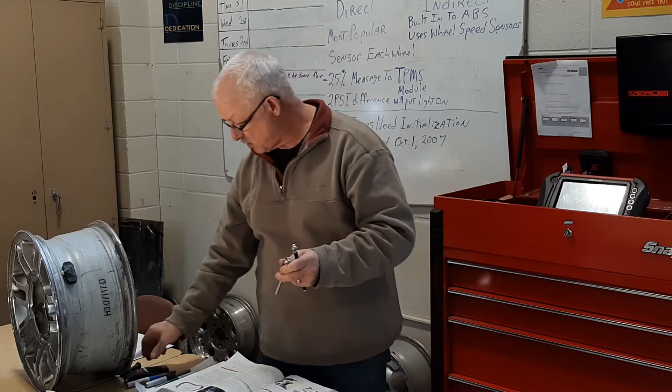TPMS is tire pressure monitoring system. Back in the day, we would always monitor our tire pressure with a tire pressure gauge. This is our typical tire pressure gauge. They do have electronic versions. And inside of your rim, you have a valve stem that seals to the rim, and you would press on there and you would know the tire pressure.

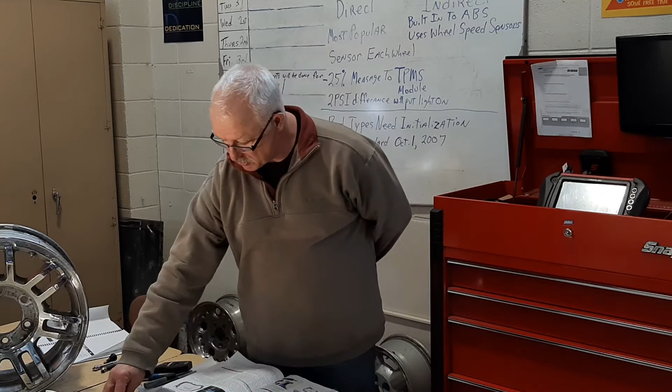All this is great and wonderful, but it does not notify the driver when they have a tire that's low on air. So what manufacturers have presented and put in cars is a TPMS sensor. This is a TPMS sensor. This is an older style TPMS sensor that bolts into the rim right here, and it seals to the rim with an O-ring. It seals right up, as you can see here.

What this sensor does is it sends out a signal to a module in the vehicle, and the vehicle monitors each individual wheel to let the driver know when he has a tire that is lower on air than the other tires. 2 to 3 pounds of air is all it takes. If your tire goes down 2 or 3 pounds from the other tires, it will put a signal on the dash that looks like this. This warns the driver that he or she has a tire that's low on air, as you can see there.

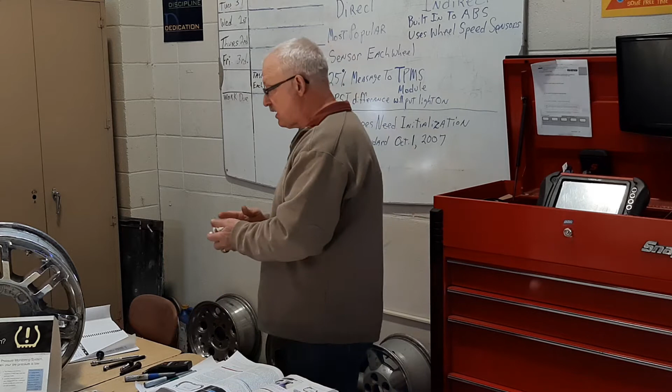As mechanics, we have to be able to put this light out. Customers don't like the light on the dash. They're warned, they're scared, they're afraid, but they don't know what that light is. So you tell them that it's low on air. Sometimes adding a little bit of air and driving down the road will make the light go out. But that doesn't solve the problem. Why did the tire lose air in the first place? It could have a nail in the tire, could have a leak somewhere. It's losing air pressure to turn the light on.

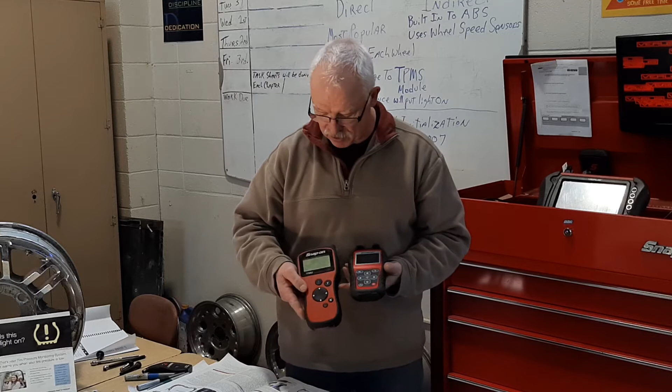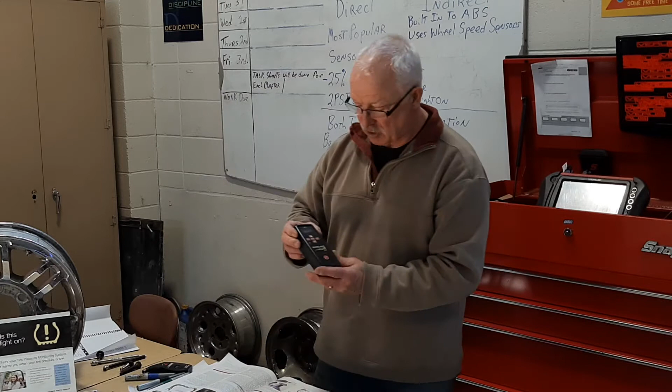Mechanics have some tools that we can use. Here's the Snap-on tire pressure monitoring tool, and we have a Maxi TPMS by Autel that does the same thing. And you can even use a small one like this, a Wheelwright Tech 300, to do the same thing.

What these tools do is you take the tool, turn it on, and put the year, make, and model into the tool. Press enter. You pick out the vehicle and the year, and you press yes. Then you scan that sensor from the outside. You press scan, and it will pull up the number of the TPMS sensor, and it will also tell you the pressure that's inside that wheel.

This is taking the place of the old tire pressure tools, the tire pressure gauge. These are what most mechanics use today to measure tire pressure.

Sometimes the light will come on, or you'll see TPMS across the dash, and it has a serious problem that gets into the computer, and you have to turn that out or figure out what's going on. These TPMS sensors have a small battery in them. Over a number of years of being used, that small little watch battery goes bad, and the tire pressure sensor has to be replaced.

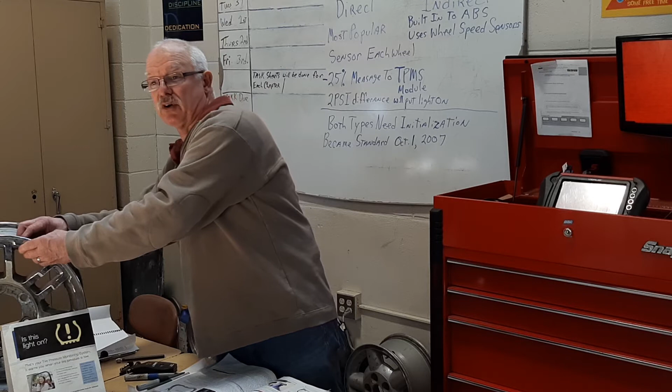I hope this helps you in figuring out what's wrong. If you have a tire pressure sensor that is bad, the tool, when you put it up there, will not pick up the sensor at all. When you go around the vehicle, do one at a time, each individual wheel, looking for the pressure and the sensor number. If you have one with a dead battery, the tool won't pick it up at all.

In our cars today, there are two types of basic TPMS systems. There is the direct system and the indirect system. What we've been talking about is the direct system. It's the most popular. You'll see it right here, this tire pressure sensor right there. This most popular direct system has a sensor for each wheel.

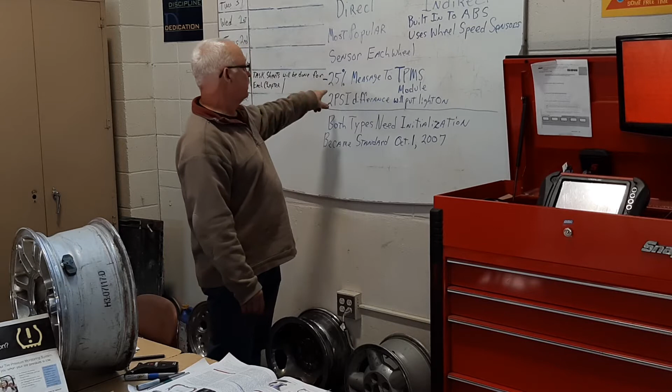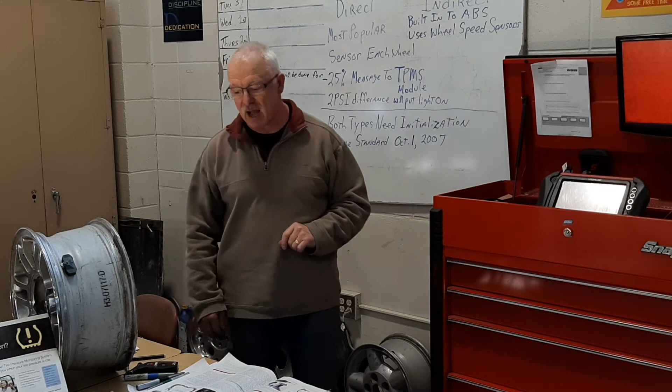A negative 25% difference between one wheel and another will send a message to the vehicle and put a code into the main computer inside the vehicle. A 2 pounds per square inch difference between different wheels will put the light on in the dash. It may not put a code into the computer in the vehicle, but it will actually turn the light on, as you see there.

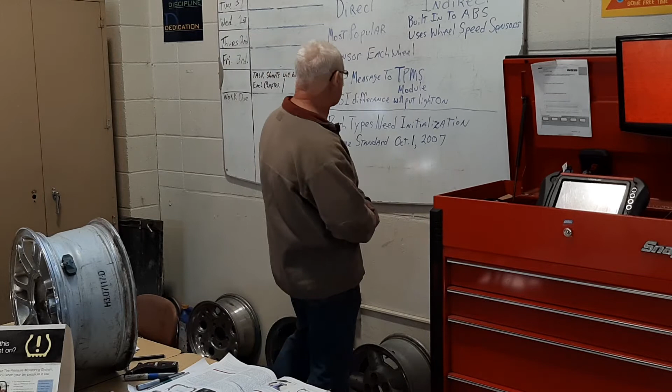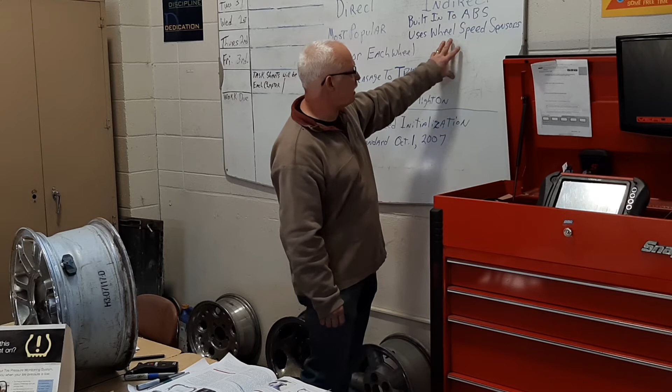Both types, the direct and indirect, became popular and standardized on October 1st, 2007. So any vehicle after 2007 is federally mandated to have a TPMS in the vehicle. This is the indirect TPMS system. It doesn't use a sensor for each individual wheel. It uses the ABS itself.

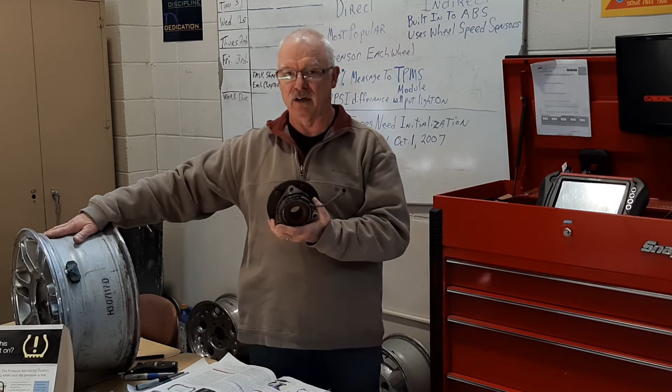The ABS: I have a hub right here with an ABS sensor in it. As you can see, there's an ABS sensor inside of here. This spins around and sends a signal to the ABS system in the car, the anti-lock braking system, and tells the computer in the car the speed of each individual wheel. If you lose pressure in a tire, the speed of that wheel is going to change. It's going to get erratic, it's going to shake, it's going to make a difference, and it's going to be picked up by the ABS system.

The indirect system is not as accurate as the direct system right here with each individual sensor. Always remember that when you put a new sensor in a vehicle, you have to reprogram that sensor. When you rotate tires from front to rear on a service, you have to reprogram a lot of the wheels, the ABS, so the computer knows which sensor is in the left front, the left rear, the right front, and the right rear. So make sure you follow the manufacturer specifications for reprogramming sensors, and to make accurate determination of where each sensor is in the vehicle at all times.

So this is the end of my short training video. I hope this helps in figuring out TPMS problems and gives you a little insight on how TPMS works. Thank you.